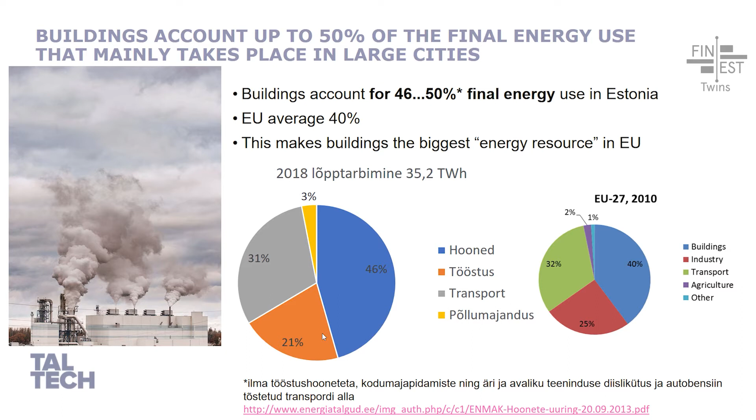First, I will start with the fact that buildings account for a lot of final energy use. This is up to 50% of the total final energy use, and that mainly takes place in large cities. So there are many challenges regarding energy, but not all of them in cities. We know very well that heating of buildings and transport are major CO2 sources in cities. But when we speak about energy improvement measures, what are typically funded as renovation grants in Estonia by KredEx, in Finland by ARA, then this is not so much in the scope of the cities because this is a state level, so a national activity.

Energy production, which is mainly district heat production, very much belongs to the city's responsibility, and in Helsinki it is even owned by the city. So it is highly relevant how to decarbonize district heat production, and also to coordinate efficiency measures in buildings together with measures in energy production so that maximum CO2 reductions would be possible. This is also very challenging. I will just show one example on that topic.

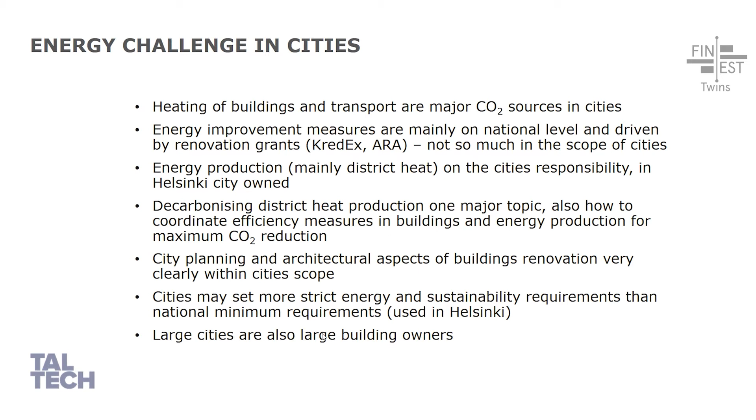Then what comes to the city planning and architectural aspects in building renovation, these are indeed very much in the scope of the cities. And cities may also set more strict energy and other sustainability requirements than the national minimum requirements, and this is, for example, widely used in Helsinki. Large cities are also large building owners, so building level energy performance also matters.

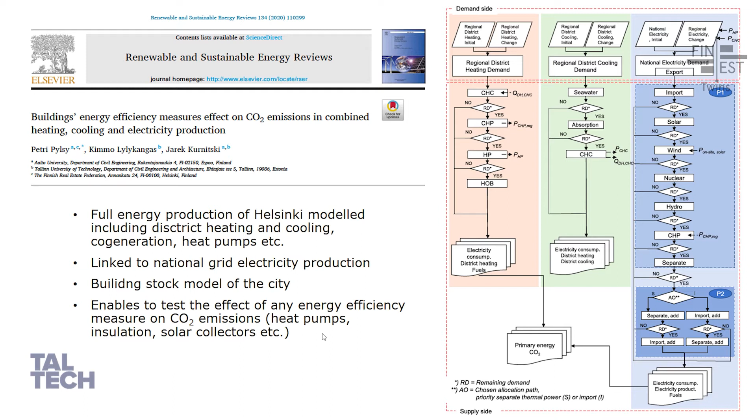This is one example about a large study where the full energy production mix in Helsinki was modeled, including all district heating and cooling plants based on co-generation or heat pumps or other technologies that have been used. And also national grid electricity production was coupled to this model, and the model included a full building stock model of the city. With such a model it's possible to test what is the effect of some energy efficiency measure in the building on the total CO2 emissions. For instance, if we install heat pumps in apartment buildings or other buildings, we can see what happens to the CO2 in the energy production, or make a deep renovation with insulation or installation of solar collectors, PV, or what else.

This study showed quite interesting results. The assumption was that 8% of current apartment buildings will be renovated. For instance, by making a deep renovation, we see that CO2 savings are between 0.4 and 3.6% of the total CO2 production of the city. And the same ranges we see for solar thermal. In some cases it's only 0%. And when we go to heat pump installations, in some cases CO2 can even be increased. In some cases it can be reduced.

So this shows how important the interconnection between the buildings and the energy system is. And it really depends on the situation in the marginal electricity production, whether this would provide CO2 savings or a CO2 increase. And that's one challenge for the cities to tackle, because cities need to decide how energy is produced in the cities. At the same time, energy performance of the buildings is improved by renovation all the time, and how to find the measures that could reduce CO2 most efficiently is a great question for further research.

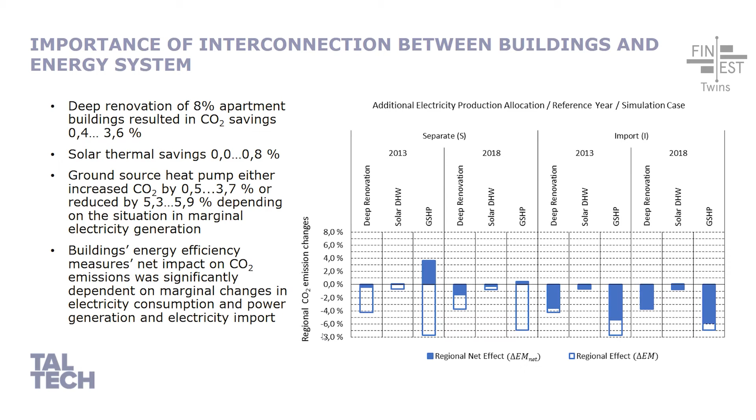Coming to another example, in new buildings we know quite well that calculated energy performance should be what is called a nearly zero energy building.

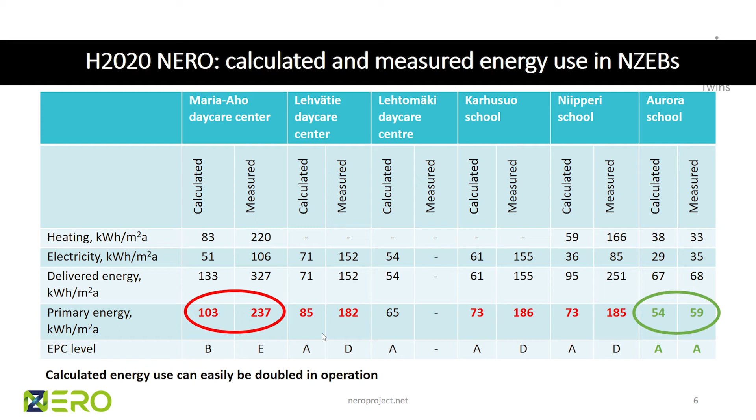But very often measured energy performance can be even as high as double of what was calculated in the design phase. And there are some day-care centers and school buildings as examples. Marked with green, we see one school building very close to Helsinki, Aurora School, where calculated energy use is quite the same as the measured energy use. So this is a good example, but in all other buildings in this slide, measured energy use is for some reason even by factor 2 higher than the calculated one, and that's indeed not the purpose.

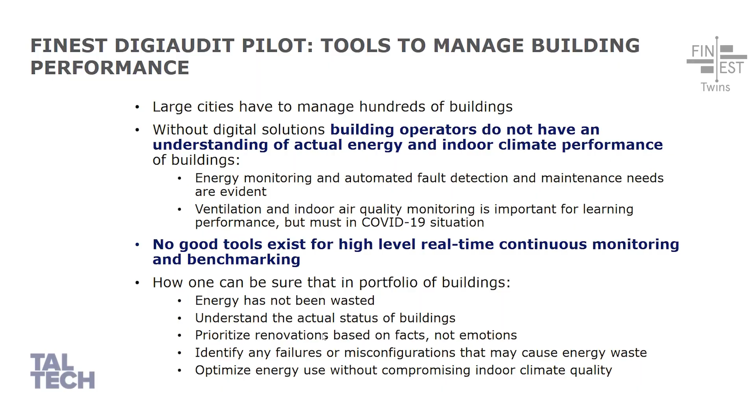This is a typical situation where cities need to manage hundreds of buildings and to have a good overview, so good tools are needed to do this type of continuous performance monitoring, both for indoor climate and energy. And now we are going to a new pilot project in FinEst Twins, Digi-audit, which aims to develop a new platform, new dashboards, and many new tools for this type of performance monitoring.

And the starting point has been a need of large cities. They have many day-care centers, many school buildings, and many other types of buildings. And this platform will provide an easy opportunity to connect all of these buildings and to follow, for instance, the energy performance in some segment of school or day-care buildings. And these dashboards are developed at different levels, so an executive dashboard will need much less information compared to a departmental dashboard.

And also one very important aspect is that performance monitoring is split from maintenance. To do maintenance and fault diagnostics in an automated fashion is a much heavier process, and that needs other types of sensors and full utilization of a building automation system. So basically all sensors need to be connected to the systems and followed for this type of automated fault detection. This is possible and highly recommended, and can lead to significant energy savings.

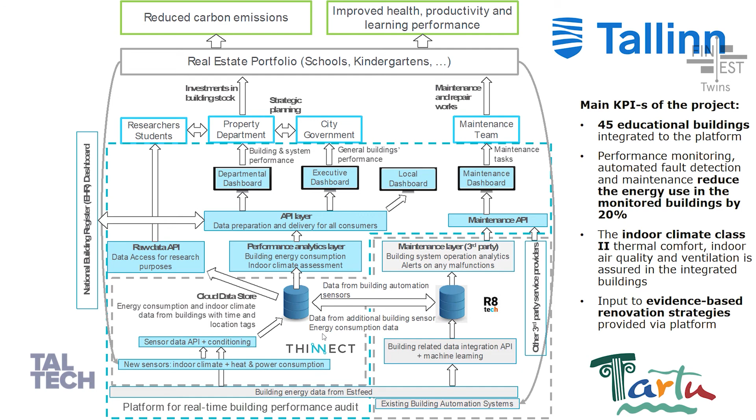But for first screening, we recommend much lighter performance monitoring, which will be based on perhaps only 10 sensors and energy meters installed in the building. That solution would be very cheap and would allow, for example, some expert in the city to do this type of work and just utilize the platform as a tool for performance monitoring. Then it is possible to see if there is something wrong in some buildings with indoor climate or energy, and if some improvements are needed, then these automated fault detection tools and all the heavier stuff would be needed.

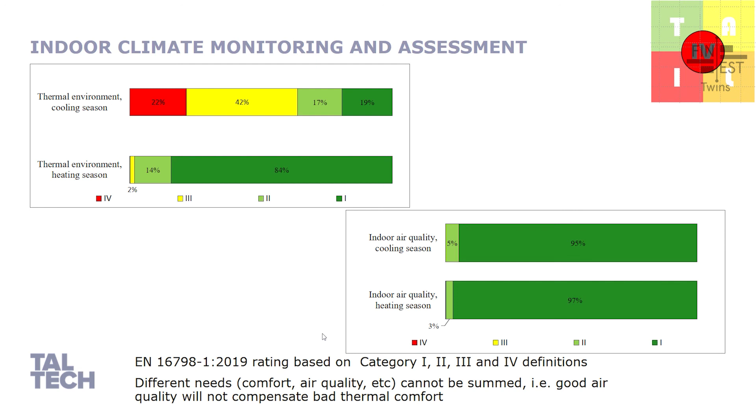To show an example of how indoor climate data can be shown as traffic light colors. There are examples of indoor air quality below, and thermal environment, both cooling season and heating season. If all is green, then we are located in indoor climate category 1 or 2, which represents either an excellent category or just a good category. Indoor climate category 2 is a common starting point for the design of new buildings.

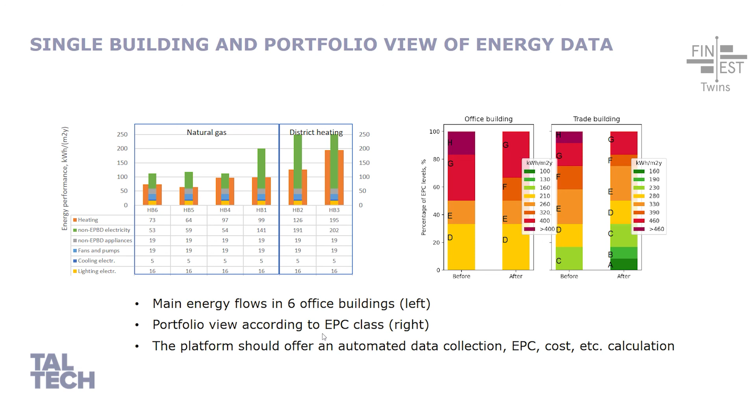And this is another example of the visualization of energy data. If we have a single building view, we can see the main energy uses in one single building, and on the right side we see the portfolio view where we can see how many buildings belong to class A, for instance, or class B, class C, according to the energy performance certificate. So these are two examples, one system-level example and another on the building level, which are both highly relevant for energy research in smart cities.